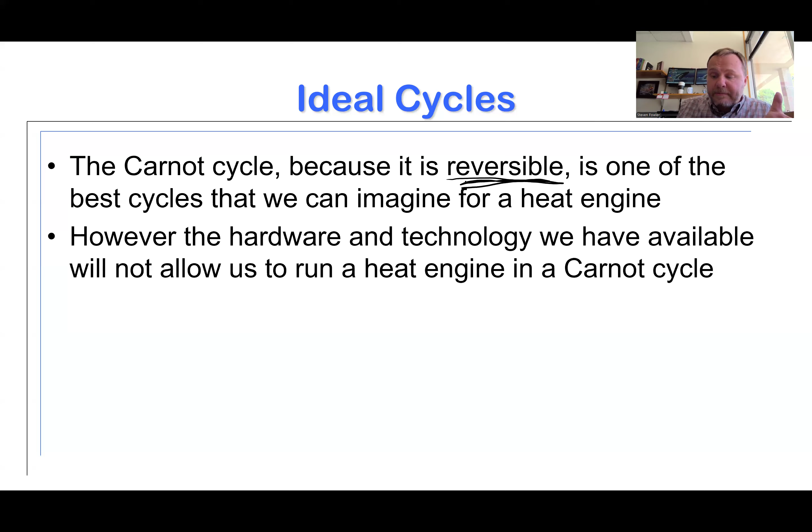Well, we could propose other cycles, other types of processes that are in fact reversible that would come much closer to mimicking real technology that exists today, and then use that as a comparison. That's really the whole focus of chapters 10 and 11. Let's look at cycles that are ideal, that are reversible, and more closely mimic real devices that we might encounter out in the wild, so to speak. And then we can use these ideal reversible cycles to give us a ballpark idea of what the real ones could potentially operate at.

Now, historically, we've employed what we call idealizations. Idealizations basically are simplifications. They're assumptions or simplifications that we can make that allow us to model something in a fashion that's much easier to describe mathematically, perform calculations and estimations on. We acknowledge that it's only an estimation, but it's close enough, or it's within an order of magnitude or better of what a real device might actually look like.

So here's an example. You can find this in our textbook, or one very similar to it in another textbook. It's a wonderful description of the difference between an idealized cycle as opposed to an actual cycle. So you see the dashed line. I assume that's some kind of a pink or maybe purple. It looks kind of pinkish red to me. I don't know what it is to you. That represents an actual cycle. So let's say we had something like an actual engine, and we plotted its pressure volume curve, and it might come out something like this.

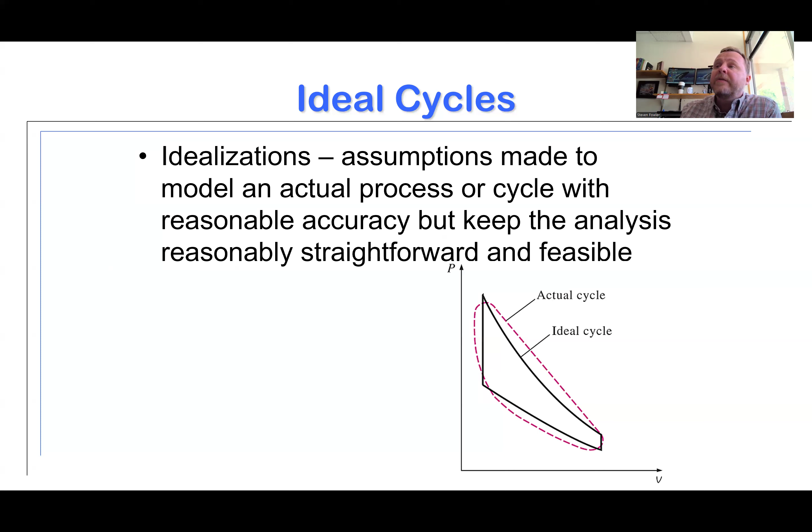And we make idealizations, we make assumptions to say, well, rather than worrying about this curve, let's just assume this is approximately vertical. Rather than worrying about this curve, here's a function that we can actually describe that fits in reality or within the ballpark of reality, et cetera, right? So that's what we're going to look at in chapters 10 and 11 for us. Different ways that we can idealize versions of real cycles with reversible processes, and therefore make it something we could reasonably estimate without a ton of effort and get us in the ballpark of what a performance for one of these real devices should look like.

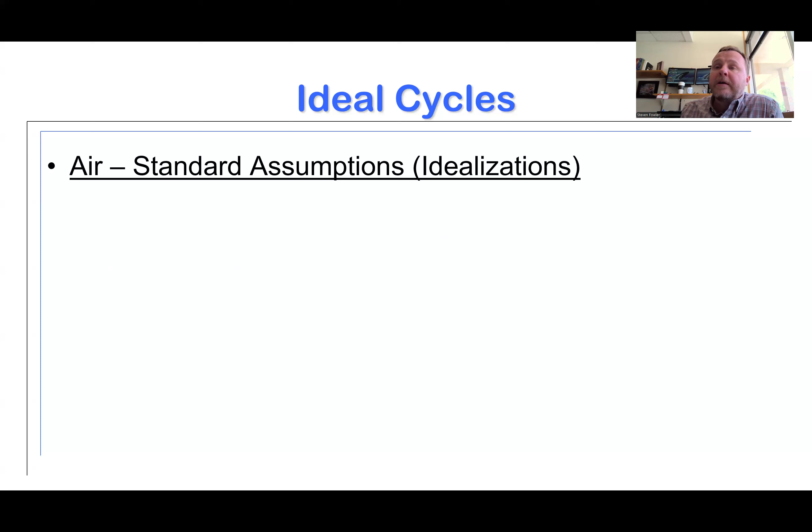So if my working fluid is air, we call that an air cycle. There are devices that exist that air cycles make a lot of sense for. Most internal combustion engines, for what we call a spark ignition sequence, where I've got gasoline or propane, something like that, or compressed natural gas, or the diesel, which is a compression ignition process. So the diesel cycle would be another example of that. These are cycles where the working fluid, the material moving energy through the process, is air. And so if I want to make air idealizations, air assumptions, these are some of the standard ones that we will use.

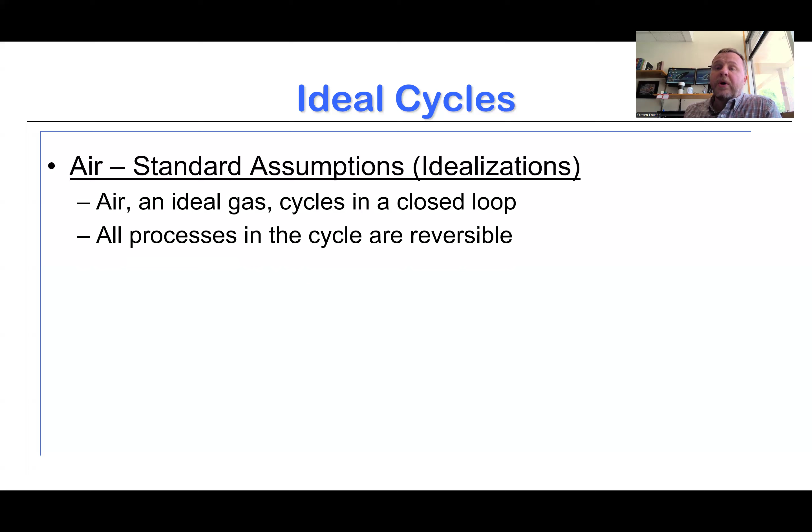We're going to treat the air like it's an ideal gas. Again, we acknowledge no gas is completely ideal, but we're trying to estimate within an order of magnitude in a reasonably straightforward fashion. So if we treat the air as an ideal gas and we keep it in a closed loop, we'll talk more about that in a second, that makes our process of analysis much more simple. Again, these are ideal cycles. These are potentially the best case scenarios. So we're going to treat all of the processes as reversible, representing the best possible version of this particular type of device.

Again, we're going to talk about models or processes that model the internal combustion engine processes. And so instead of having an air fuel mixture where I'm going to burn some of that fuel and release the energy, and now I've got how much of that air fuel mixture actually burned, what is the composition of the fuel, how much energy is stored, what's the chemistry look like, what's the stoichiometry on it. We're not going to worry about any of that. We'll leave that for a later course. Later courses can look a lot closer at how much material is combusted, how much energy per unit mass gets released. For us, we're going to keep it straightforward.

It's just heat addition. So I'm going to have a bubble of air in a closed system. I'm going to put heat into it. And I'm going to heat the air up. And then rather than in a real engine where I've got this exhaust, the spent air fuel mixture, now I've got to yeet, if you will. I got to kick it out of the engine. I got to exhaust it out of the engine. And then I've got area now I can replace with the brand new unspent air fuel mixture. No, no, no. We're not going to do any of that.

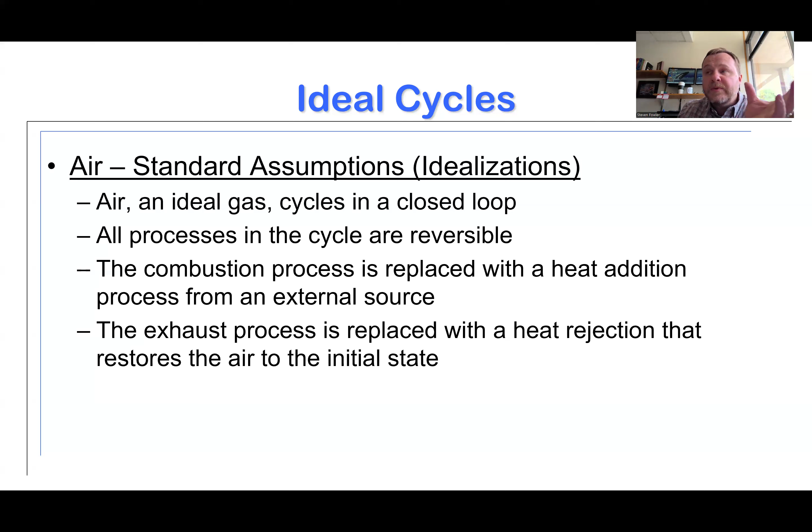For air idealizations, what we're going to do is, again, not going to worry about the chemistry of the combustion. We're just going to add heat in. Not going to worry about the exhaust process. Do I get all of the material out in the exhaust process? How much spent air fuel mixture gets left? Because I can never get all of it out. No, none of that. We're just going to add heat in for combustion. We're going to reject the remaining heat to represent the exhaust process. And that's going to get us a nice estimate, at least within an order of magnitude, of what we would observe in a real internal combustion engine.

Okay. The last thing here, I didn't realize I didn't have any more bullet points on that last slide.

So I went back and here we are. The last thing on this. So I know some of my students in class, sometimes I really get on them about not just pulling specific heat properties at room temperature. In most cases, that's wrong because we're trying to get a little more significant figures than that. Here, we actually go against that now. We do change that specifically for ideal cycles.

We can actually just simply pull the specific heat and thermal properties of our air at room temperature as a reasonable assumption throughout the process. Because again, we're not trying to get 4 or 5 significant figures. One or two is really probably the best we're going to do here. So the specific heat at room temperature is going to be, to 1 or 2 significant figures, the same as any other temperature on the spectrum.

So very often, if you're working a problem for me in my class, if it's an Otto cycle... I'm not going to ask you guys to work any diesel cycles. We're going to point to them and say, here's the differences. We will work an Otto cycle problem or two in the homework, and there will be one on the final for my class. On all of those, I am perfectly okay if you want to make this cold air assumption.

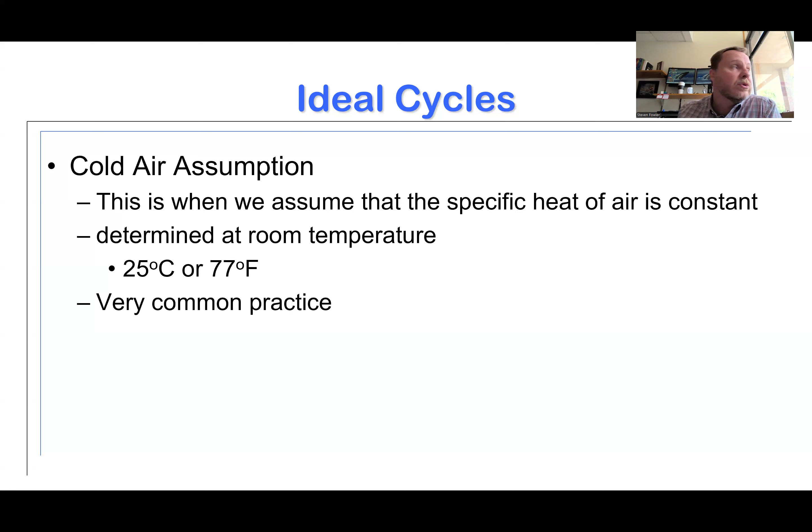There's plenty of other stuff going on with these problems, and having to guess and check to find an average temperature specific heat and keep track of how it varies throughout the cycle, no, it'd be enough to just pull specific heat at room temperature for these problems. Now, all the chapter 7 and 8 type problems and before, no, go get a good specific heat at the average temperature. Chapter 10 problems, room temperature will be just fine.

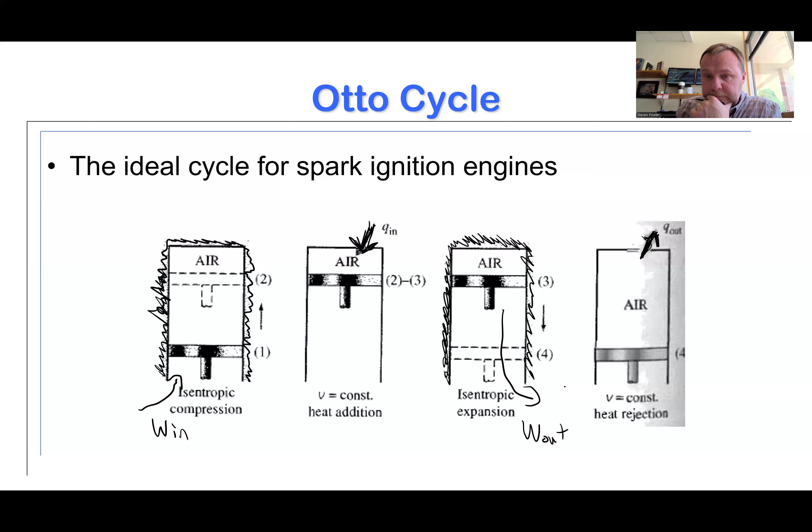And this is what it looks like graphically. Isentropic compression from a large volume to a small volume, adding heat while holding the volume constant, which increases the pressure and the temperature, then expanding it isentropically out to state 4, back out to the larger volume, and then rejecting the remaining heat to complete the cycle and get it back down to 1.